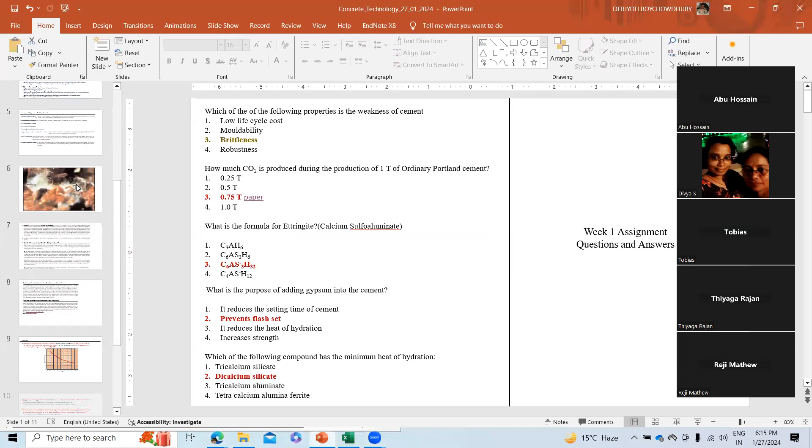So now this is the week 1 lecture. Actually, I want to show you these slides I have prepared for you, including the assignment questions and related information.

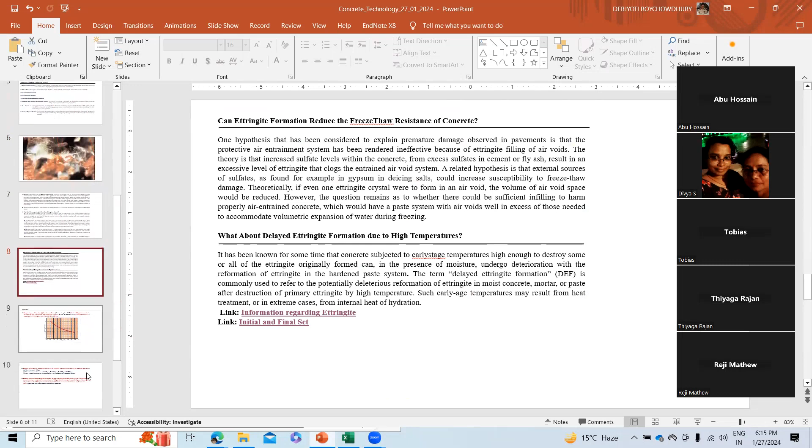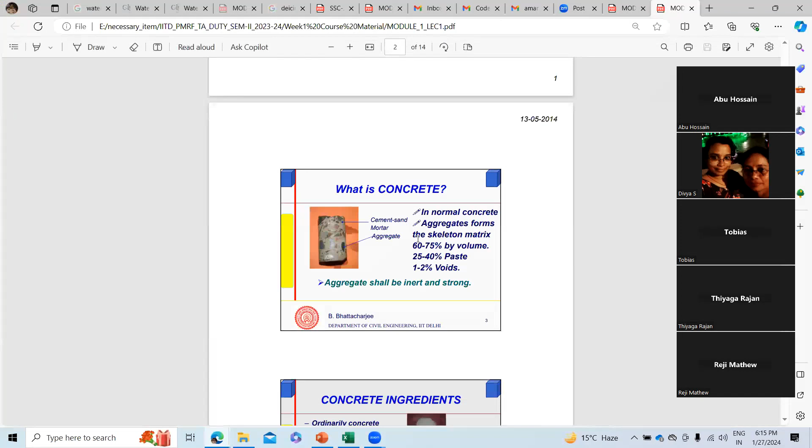So this, you have already access to it. This is concrete, and concrete is made up of cement, sand, mortar, and aggregate. The cement paste is one portion occupied with cement and water, with no sand. Aggregate is like the skeleton, 60 to 75% volume. Paste is 25 to 40%, and 1 to 2% is voids.

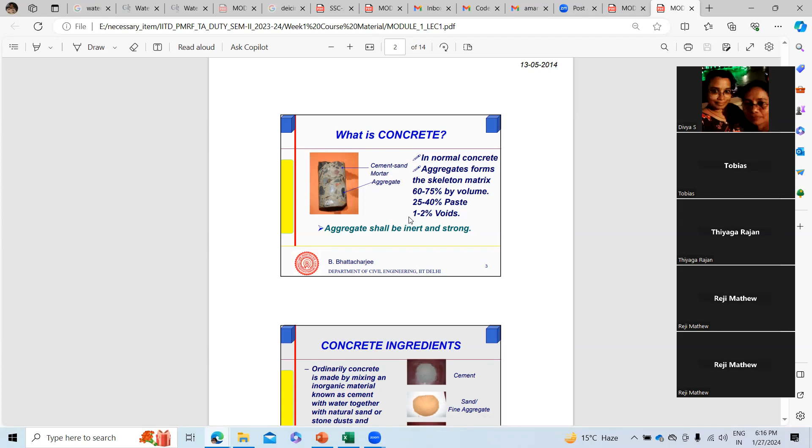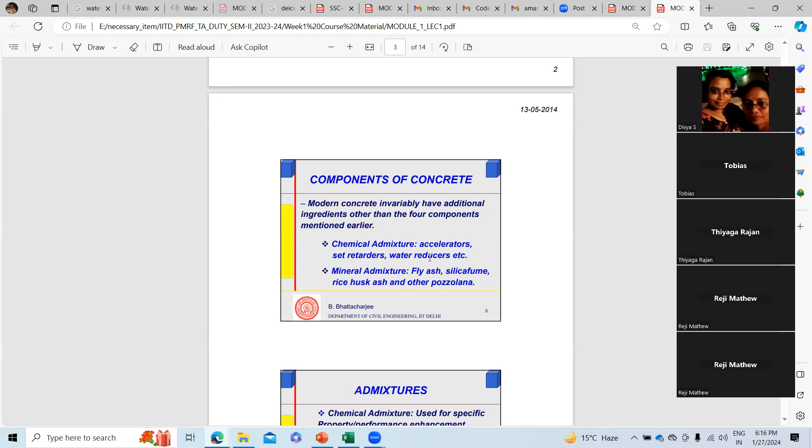So now this is the cement, sand, and aggregate samples being shown. And if you go to advanced concrete, there are accelerators and retarders, which can increase or decrease the setting time of the cement.

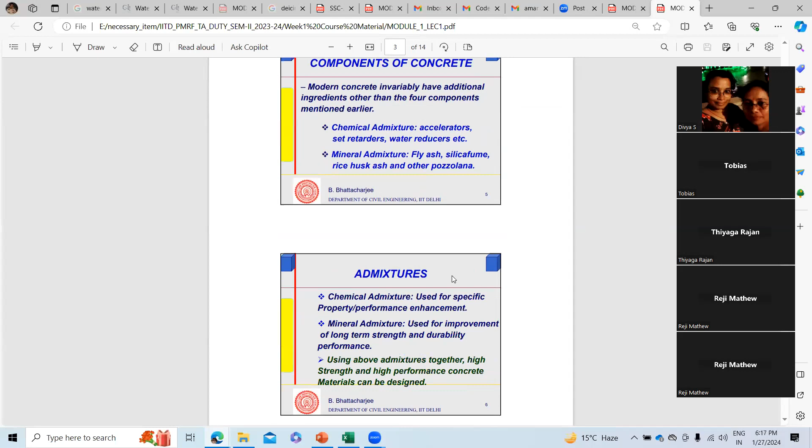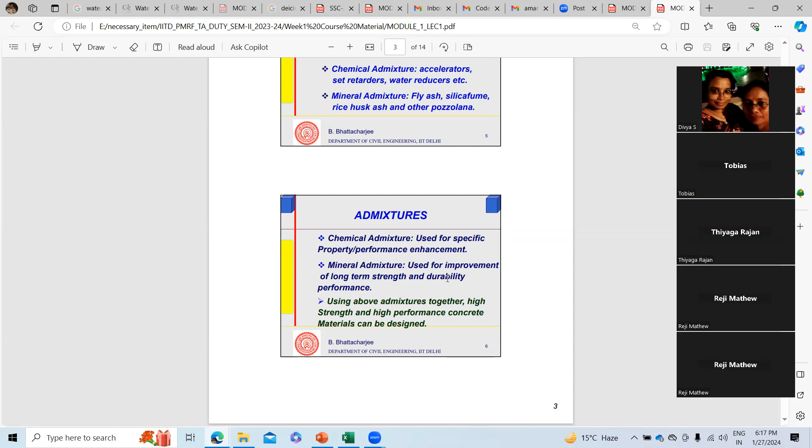With mineral admixtures like fly ash, silica fume, rice husk, and chemical admixtures used for property and performance enhancement, there are specific functions mentioned for specific performance enhancement. Chemical and mineral admixtures improve long-term strength and durability, so using admixtures, high strength performance concrete can be designed.

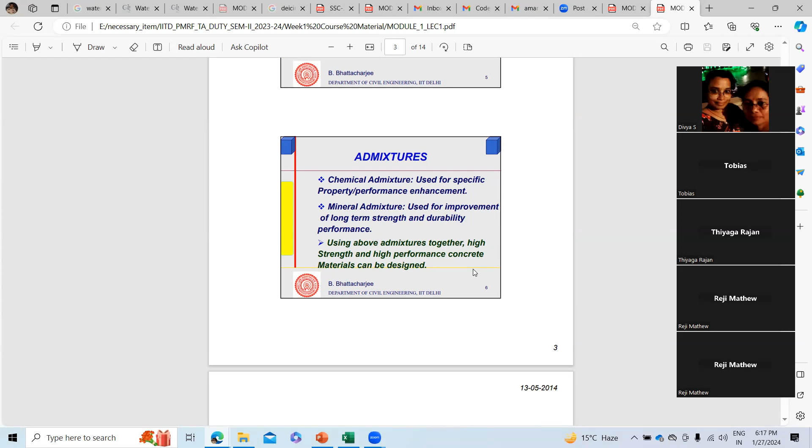So with admixture, the admixture part comes into the design mix. In the conventional mix, there is no admixture—just three components: cement, coarse aggregate, and fine aggregate. That's the standard mix. In the design mix, we can use these admixture quantities.

So advantages and disadvantages: low life cycle cost. Life cycle cost actually includes the initial production cost and maintenance cost across the whole cycle—so it is the total cost. That's how it can be summarized.

Moldability: if you make some cement paste, you can mold it according to your own shape—it's a plastic behavior. Robustness: when it comes under compression, it is robust, but in tension, it is not robust. That's how it can be characterized.

It can be designed with desired properties, but has low tensile strength and low ductility. Ductility means if you apply tension or energy, the material absorbs the energy before it breaks—ductility measures how long it absorbs that energy.

If you look at the stress behavior of a steel section, after reaching the yield point it stretches—that straight line, horizontal portion, is much longer. Then before it fails at the particular failure point, there's a long duration from yield to failure. If that duration is long, the material is more ductile and absorbs more energy.

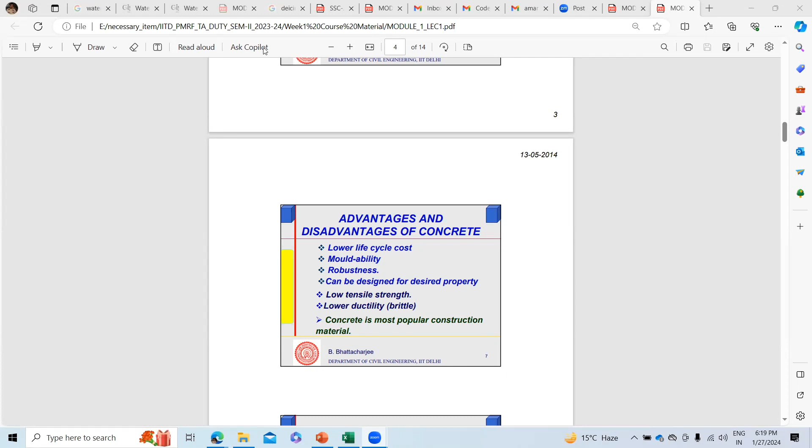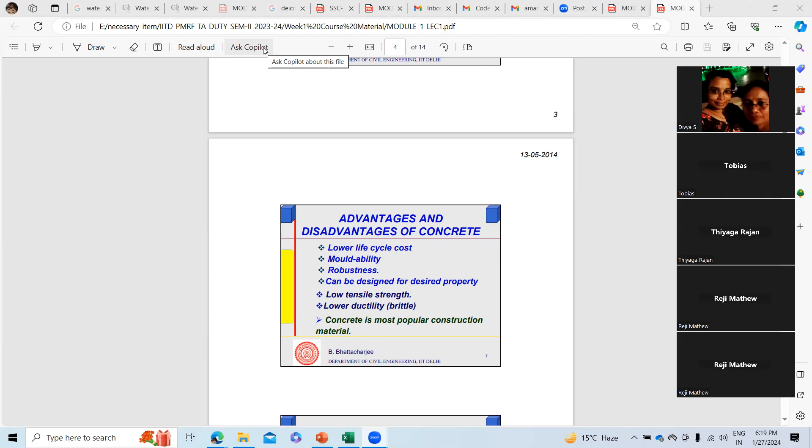But for brittle material, it does not show that ductility—it just breaks at a 90-degree angle. For ductile material, a cup and cone failure takes place instead. I'll show you the cup and cone failure sometime later. So this is the concrete composite.

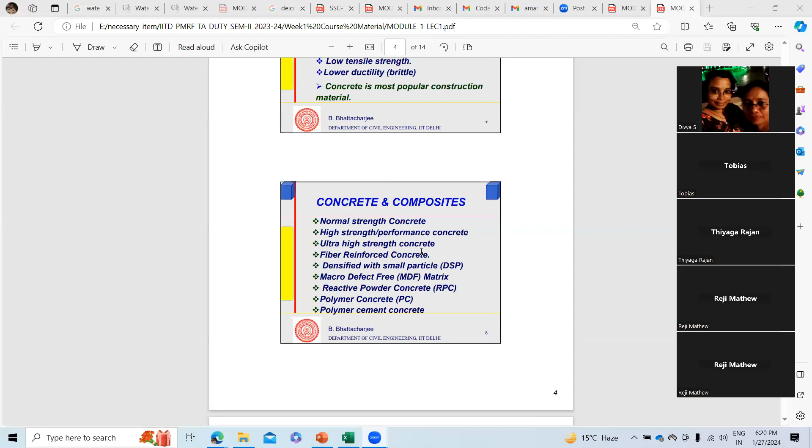This is various types of concrete: normal strength, high strength concrete, ultra performance concrete, and also polymer concrete, polymer cement concrete. So this is the concrete composite and reinforcement.

This is lime and silica. First of all lime was used as a construction material. Then lime and volcanic ash were used in Roman times as a building material. And in India, it is lime and Surkhi.

So actually this is the lime. Yes, I prepared some. The lime plus silica, if you mix it up, it reacts and makes some compounds. It reacts with water, and then it must get hardened.

When lime reacts with silica, it makes amorphous silica. Amorphous silica is less stable and ionized, so it reacts with water more rigorously. In the crystalline stage, it is not reactable - it is an organized, stable form. So when lime and silica react, amorphous silica is formed.

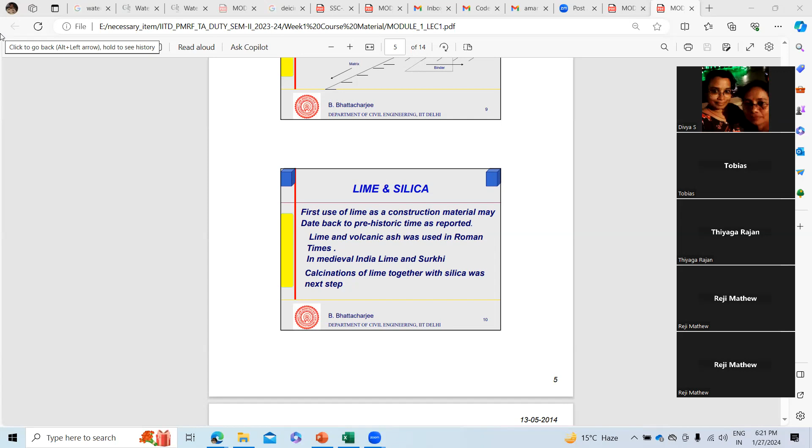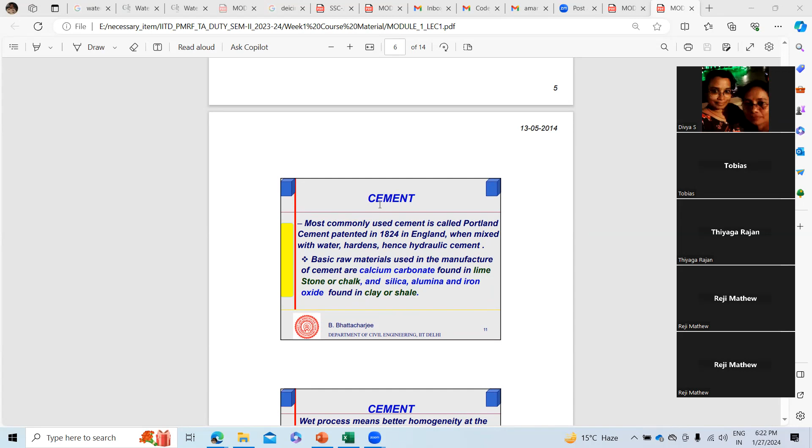Volcanic ash is also composed of particles - this is the way it forms. Most of this history leads to Portland cement. In England, there is a place called Portland where this type of cement was first found.

I think these are also relevant points. This is the wet process - actually an obsolete process. When there is slurry in the cement paste, we do it in the wet process, we follow the wet process. However, nowadays it maintains the dry one. So this is the wet and dry process.

The modern process is dry, and grinding depends on raw material fineness, typically 10 to 30%. Fineness should be such that, for 100 grams of sample passed through a 90 micron sieve after grinding, it should retain 30% - 30 grams should retain on the 90 micron sieve.

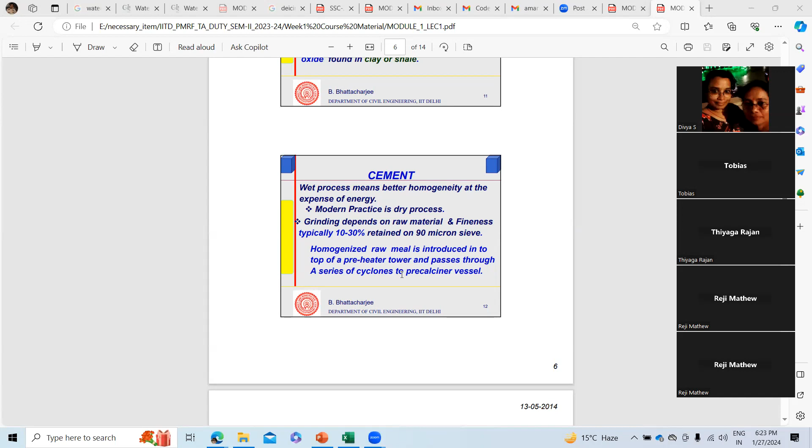So the homogeneous meal is introduced at the top. This process shows cement production - how it goes into the preheater, then passes through stages of temperature. Then tumbling action occurs, forming some solid, and then it makes clinker, with which gypsum is added. Finally the cement is done. I'll come to this later.

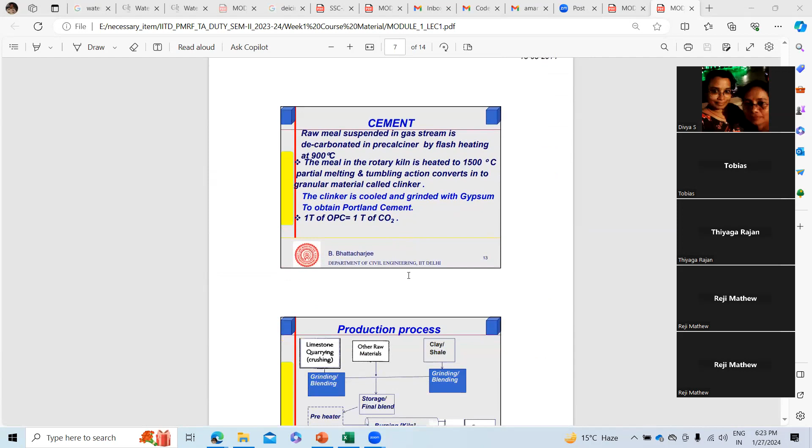Now the raw material suspension is shown here too - the decarbonation process and various stages of temperature that I explained, including 1500 degrees Celsius, where various cement compounds are formed.

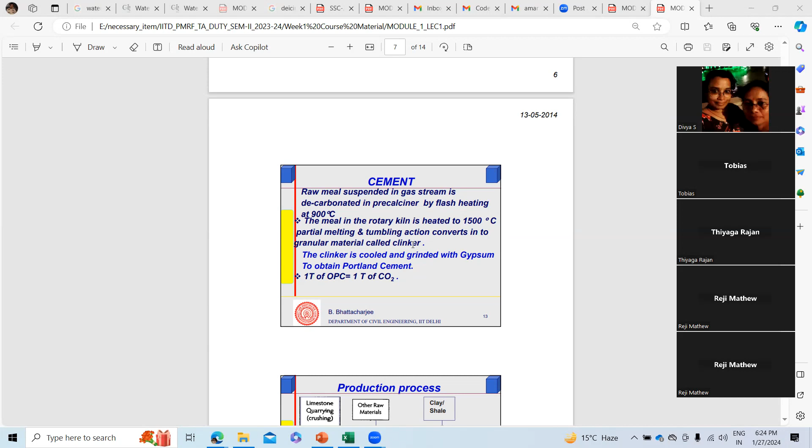Cement compounds are C3A, C3S, C2S, C4AF. C3A means tricalcium aluminate, C2S is dicalcium silicate, and C4AF is tetracalcium aluminoferrite. C3S and C2S both have other names: C3S is alite and C2S is belite. You can remember it this way - these are short abbreviated terminologies for the compositions.

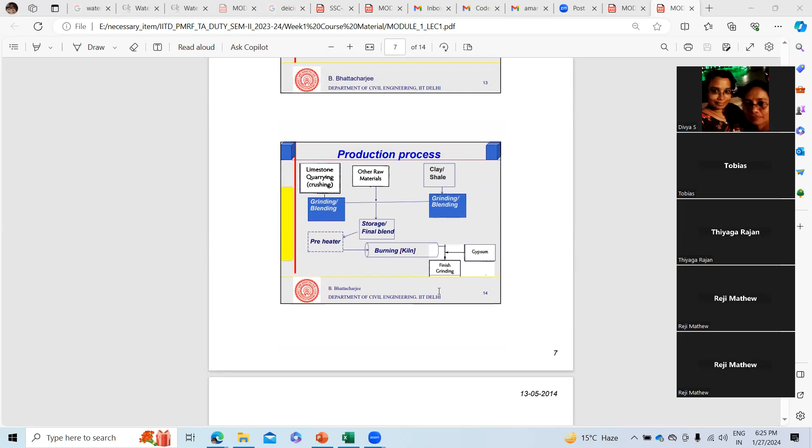This is how it goes with cement production: limestone, then grinding. I'll show better with this - we make some ingredients, meaning calcium carbonate, which is like limestone, silica, and clay shale. We put them together and burn it.

Free water is evaporated through dehydration between 50 to 600 degrees Celsius. Then at around 550 to 590 degrees, clay decomposes, and in the calcination zone, lime decomposes - then after lime decomposes, that's about 900 degrees.

You can see at about 900 degrees Celsius lime decomposes, and there is also the initial formation of C2S, that is dicalcium silicate, also called belite. It's between 1000 and 1350 degrees Celsius, and in the clinkering zone, around 1500 degrees Celsius, the C3S formation is done. After that C3S formation, there is a tumbling action. With the tumbling action, that melt gets solidified, and it forms clinker.

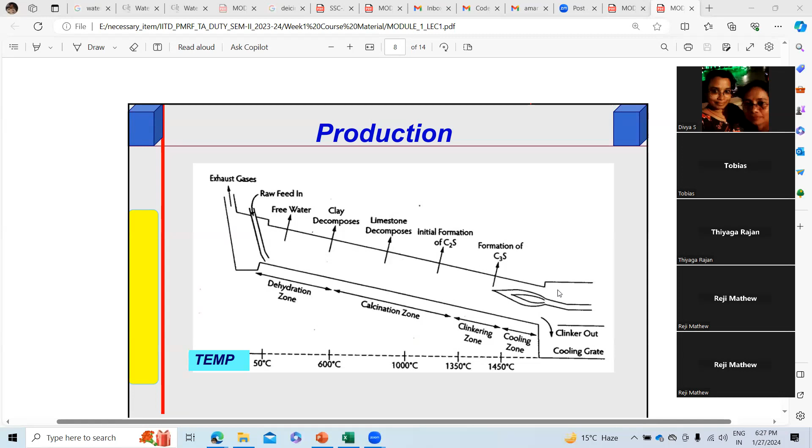So the gypsum maintains some setting time. If the setting is much faster, then if there is some delay, the cement gets clogged. So there should be some setting time duration. That part is maintained by adding the gypsum. So this calcium carbonate, as already mentioned here, with silica and iron, are all mixed up and heated to 1500 degrees Celsius.

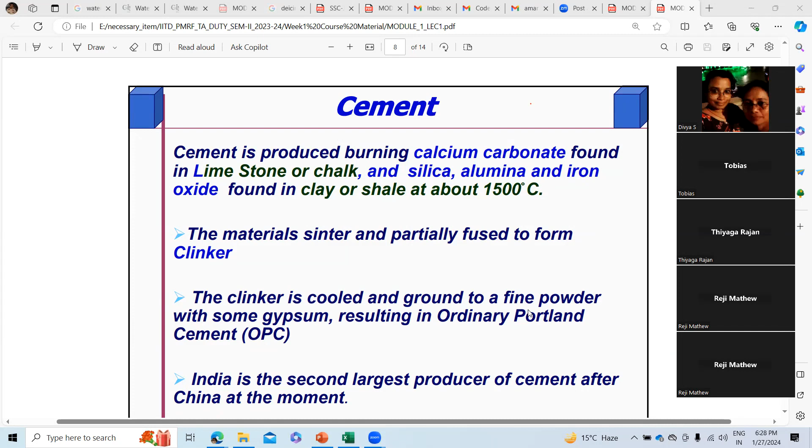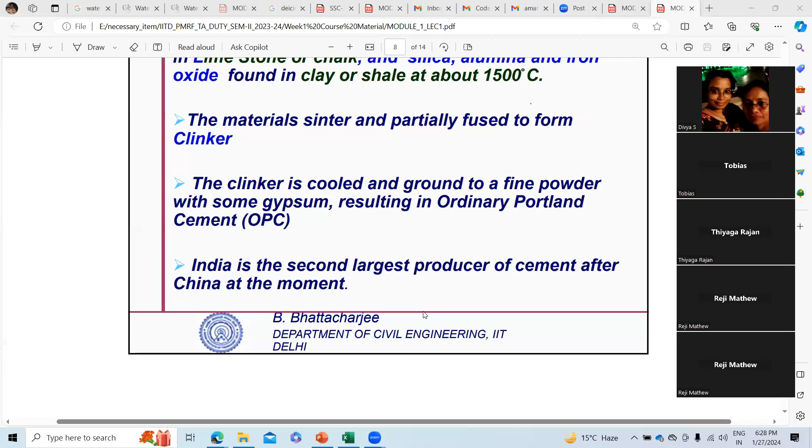So after final formation of the cement clinker, it gets cooled, and then the gypsum is added and ground. So these are the stages. After cooling the gypsum is added, not before cooling. So you have to take care of this. This is the clinker I have also mentioned. This is ordinary Portland cement; all this process is based on ordinary Portland cement. Actually, this process was followed in England, and they produced this cement. It is a methodology that they developed. And you can see India is the second largest producer after China.

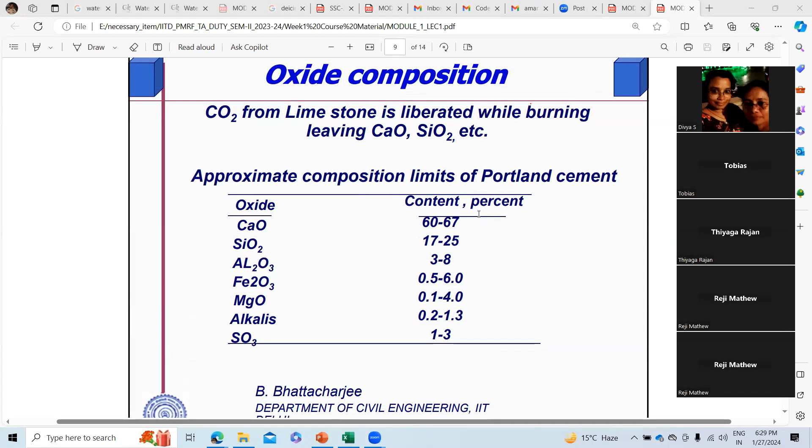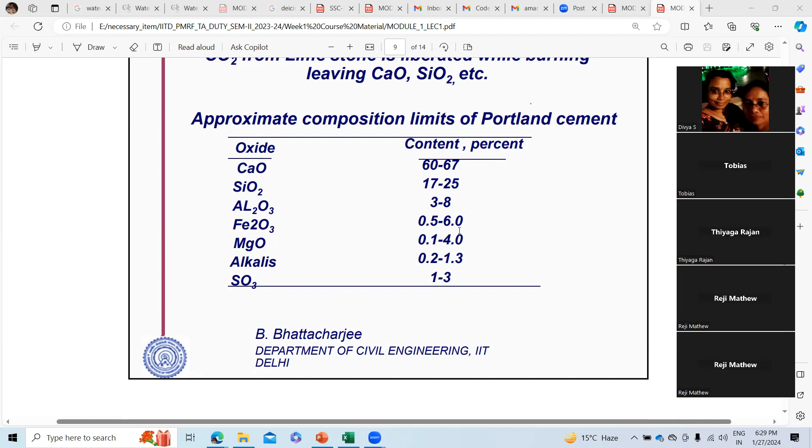And these are the compositions of Portland cement, where CaO, calcium oxide, will come to this abbreviation. For the sake of our codes, we will directly write CaO as C, SiO2 as S and Al2O3 as A. So this is the composition: CaO forms 60 to 67%, SiO2 17 to 25%, Al2O3 3 to 8%, and 0.5 to 6%. These are the components, and all the abbreviations are there; you can check.

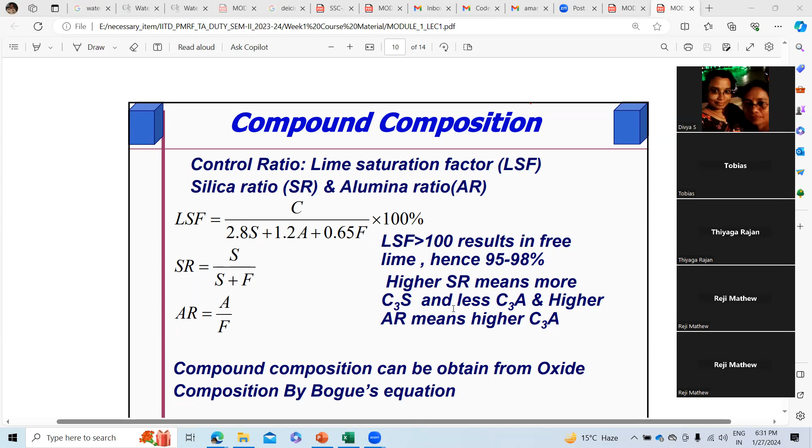And this is the lime saturation factor. The lime saturation factor is CaO divided by 2.8 silica plus 1.2 alumina plus 0.65 iron, times 100%. This is the ratio or parameter to characterize the cement compound. If the LSF, the lime saturation factor, is more than 100%, it results in free lime, and free lime can react more with the composition. Higher SR, silica ratio, means more C3S and less C3A, and higher AR, alumina ratio, means higher C3A. So these are the Bogue compounds.

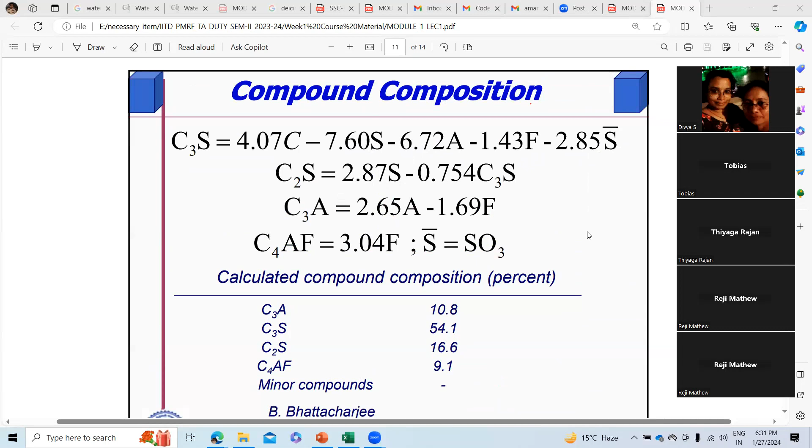With the Bogue equation you can find this relation, where you can compute C3S, C2S, C3A, and C4AF with the calculation. And here is the S bar; this S bar is nothing but SO3. So these are the processes I already mentioned, the stages of how it works.

In calcination, lime is put in, and with the lime the clay minerals are there. Before it reaches 600 degrees Celsius, the water gets evaporated. Then at 800 degrees Celsius the CO2 gets evaporated. Then at 1000, belite, C2S, is formed, and free lime makes up some portion between 1000 and 1200 degrees Celsius, and at 1500 degrees Celsius alite is formed.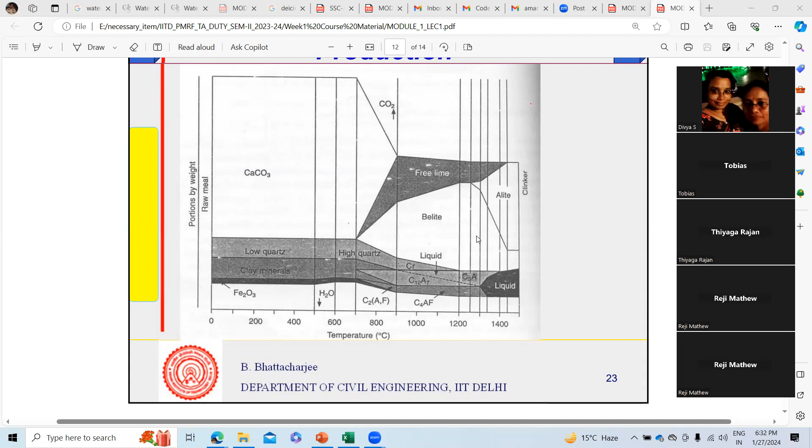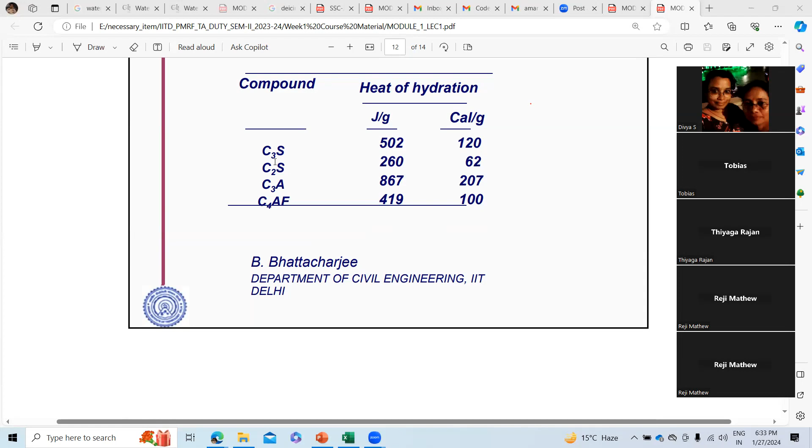So, the heat of hydration, see, this is the heat of hydration. You can check C3S, C2S, C3A, and C4AF. The maximum is C3A. C3A reacts quickly with water; I can show you later how it reacts. C3S gives the initial strength of the cement, and C2S gives the ultimate, long-term strength. C3A does not give much strength, but its heat of hydration is much more.

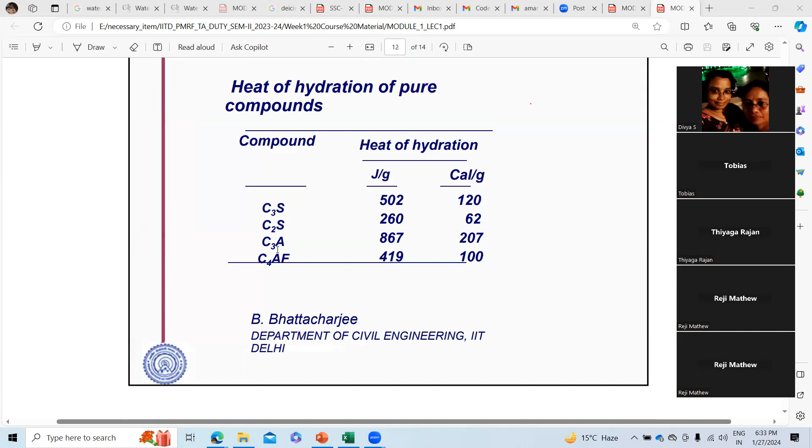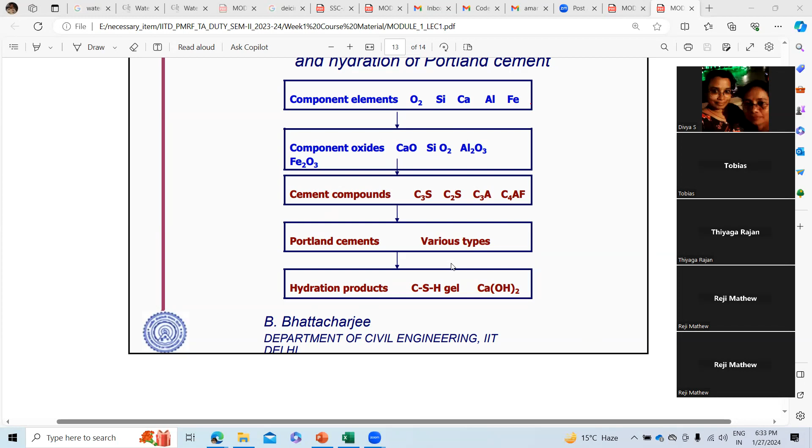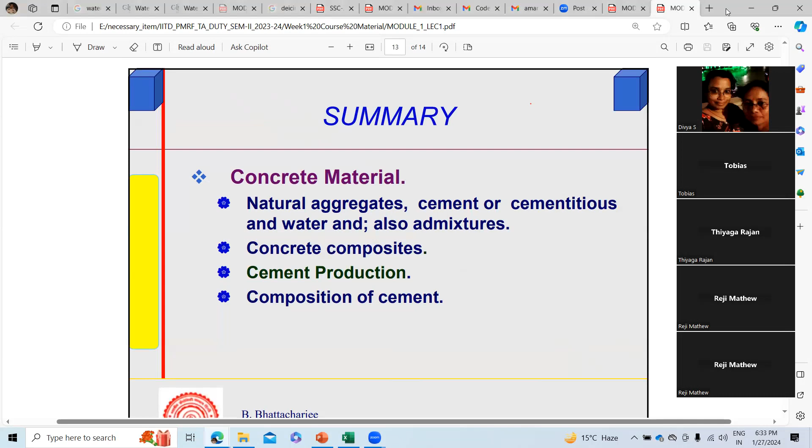And with this, it completes the first process of module lecture 1. So I'm closing it.

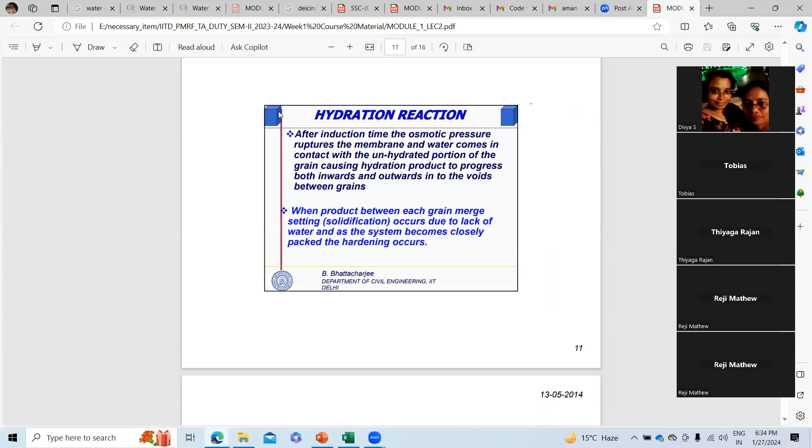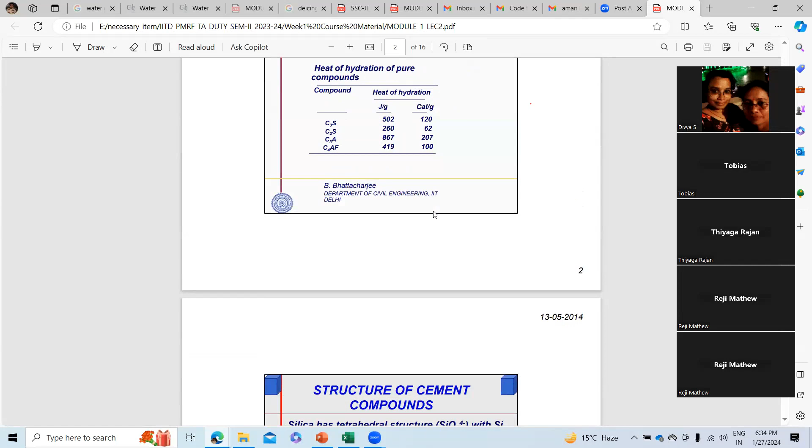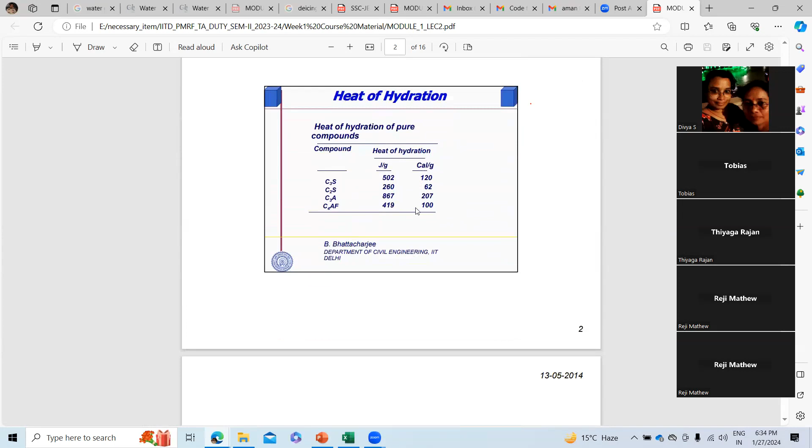And now lecture 2. Yes, lecture 2, I'll just summarize this. Lecture 2 is mainly the hydration process and bonding actions. So these are the things you have to take care of. Yes, so already these are the...

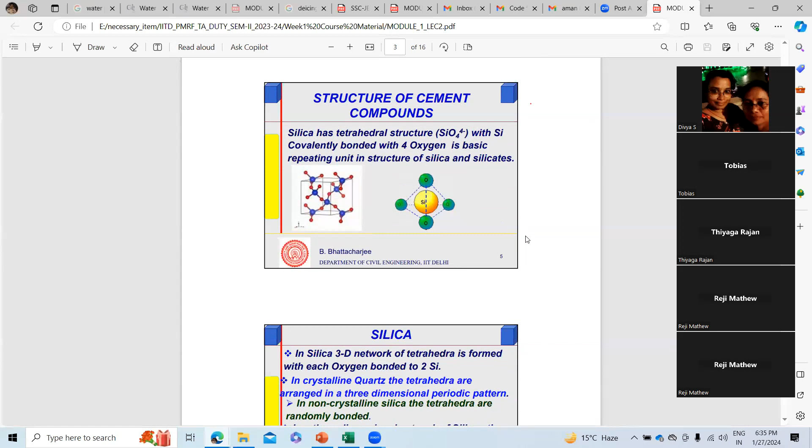Molecular and intermolecular structures. Intermolecular structure means how it is bonded with the other atoms. See, this is silica, the tetrahedral structure. Silicon is the center atom, and in this tetrahedral shape the oxygen is arranged. The four oxygen atoms are arranged with the one silicon atom. It is a repetitive structure, and with the repetition it makes silicates. So this is the silicates.

This is like quartz, a 3D network of tetrahedra with each oxygen bonded to two silicon atoms. In crystalline quartz, the tetrahedra are arranged in a three-dimensional periodic pattern. In non-crystalline silica, the tetrahedra are randomly bonded in a three-dimensional network. Silica and other oxides can be dissolved to yield a number of both crystalline and non-crystalline silicates.

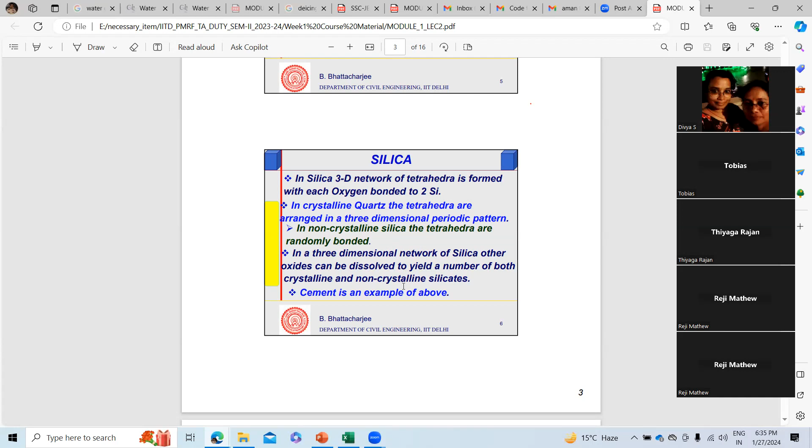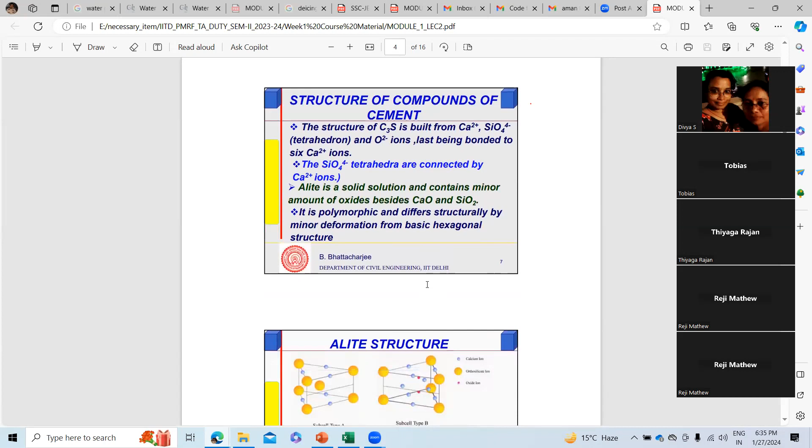So these are the structures. In the structure, what you see is this alite structure. The alite structure is like a triangular shape.

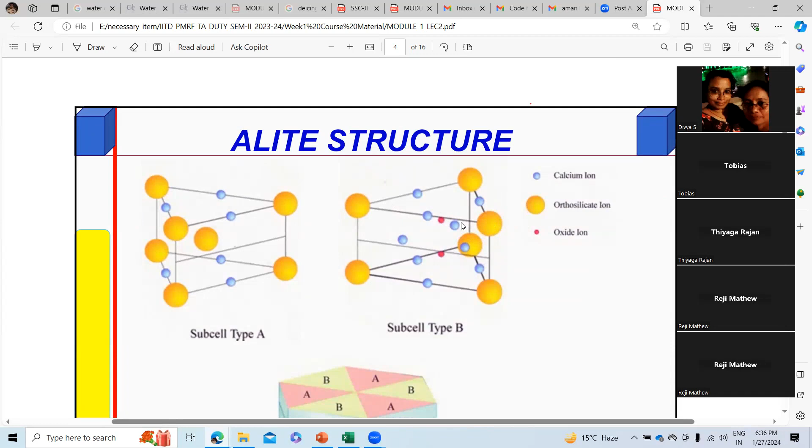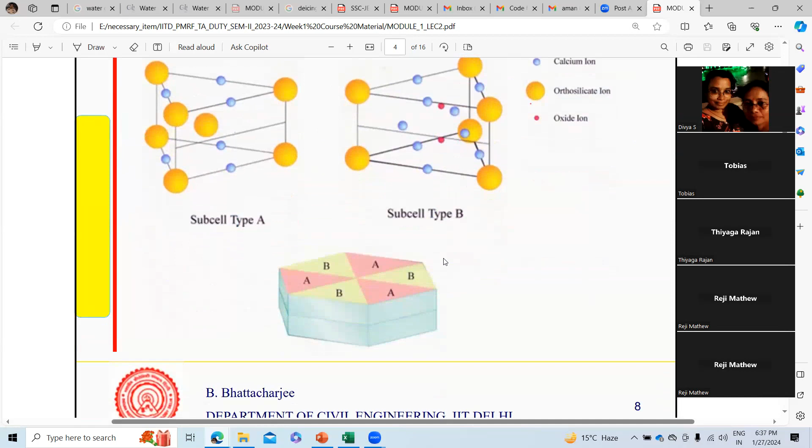So this is the subcell of A and B. This is the calcium ion, and also this is the orthosilicate ion. The large portion is orthosilicate, in between the calcium ions are there, and inside the oxide ion. Arranged together in this structured way, this is the alite. Alite means C3S, and in the belite formation it is different: the orthosilicates and calcium ions are arranged around it. And also the C3A formation.

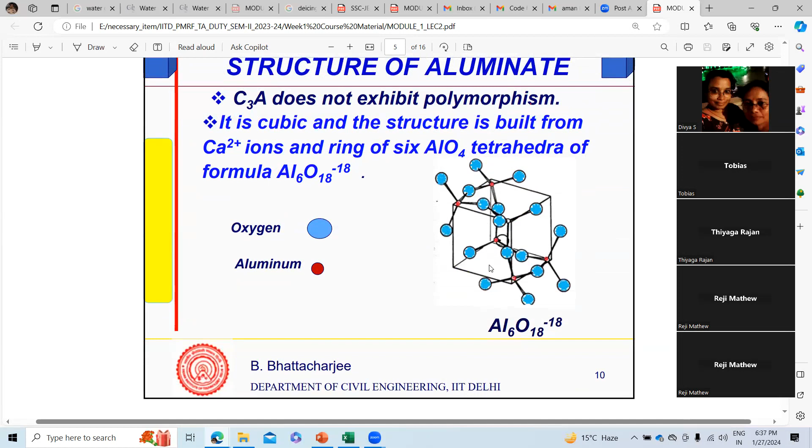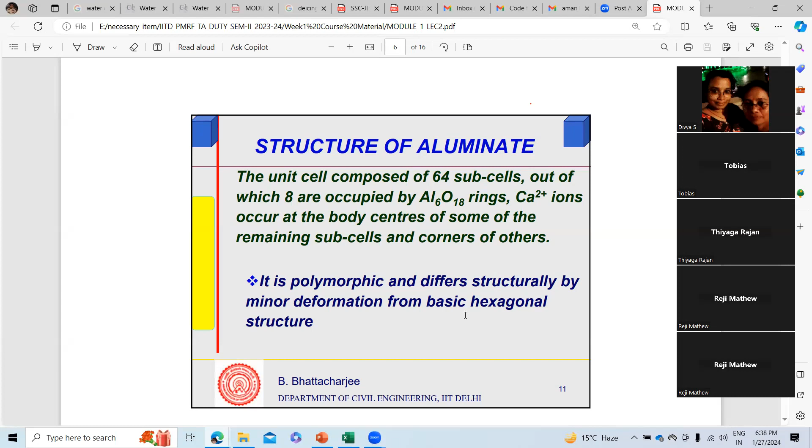It is polymorphic and differs structurally by minor deformation from the basic hexagonal. Actually, polymorphic means it can be a stretchable polymer. It's a polymeric reaction. So that is the thing.

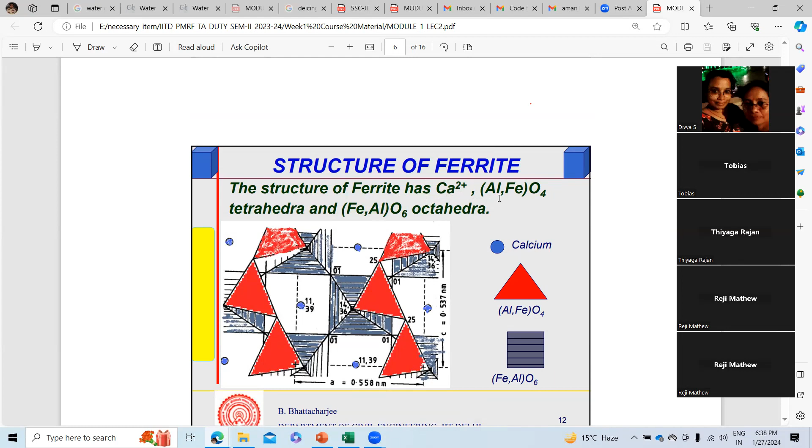Also there is the aluminate ferrite. The ferrite structure is Ca2 with AlFeO4 tetrahedra and octahedra. These are the formations where the FeAlO6 are in between. This is the triangle and rectangular shape, with calcium in between. So this is the aluminum AlFeO4 that is in between.

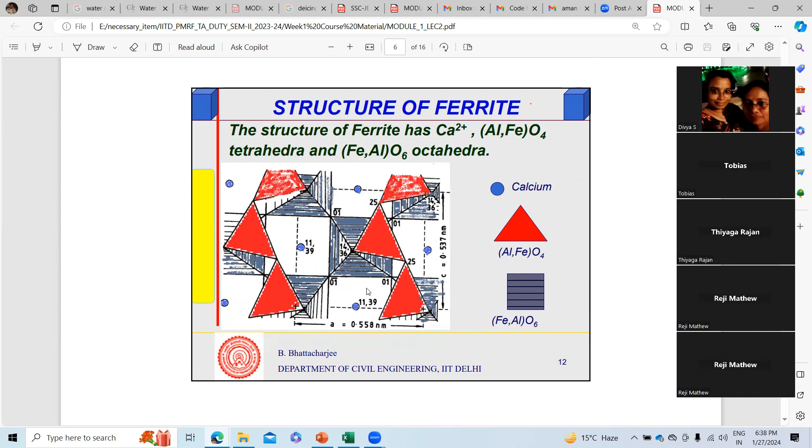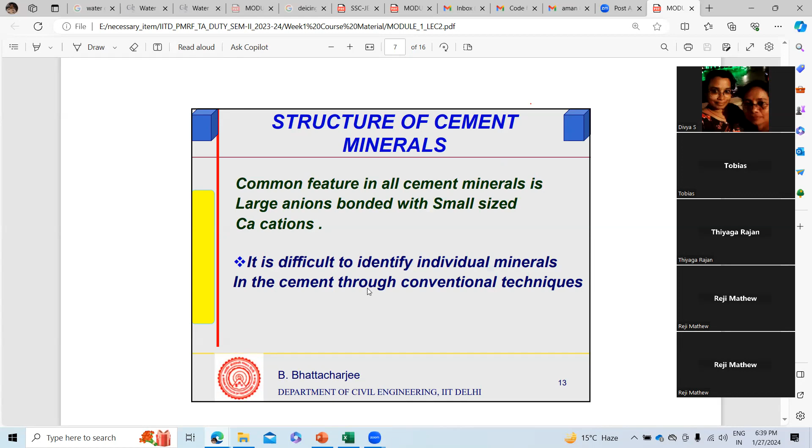So common features: a large anion and a small size cation. Actually, one point comes here: because of the difference in size of anions and cations, there is a space made. Because of this...